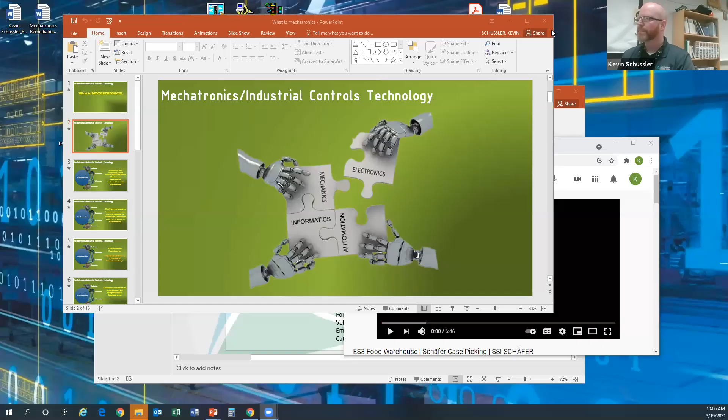Let me pull my screen up here. Share. It's taking a little bit, apparently Zoom is going a little bit slow today. There it goes, now it's sharing my screen. Or maybe not, it cut me off. I'm gonna have to share from this view because it went up. There it went, it finally just popped up. Give me two more seconds here, it's a little technical difficulty with the screen sharing. All right, we're going to share it this way. This PowerPoint has a lot of automation in it. Obviously we're talking about mechatronics and automation, and so this PowerPoint has a lot of automation in it, and I guess Zoom doesn't really like that too much. So we're going to talk about it slide by slide.

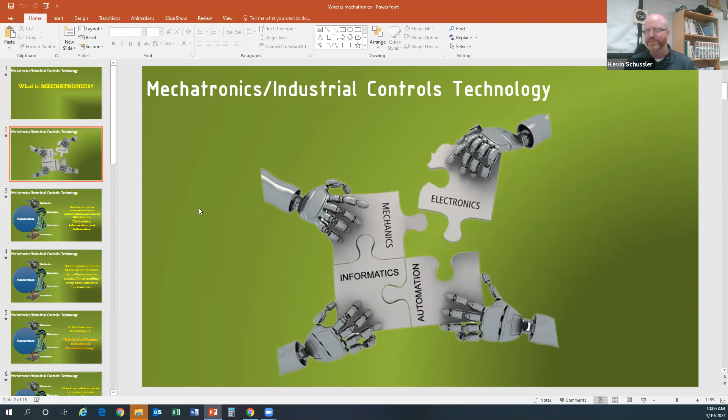I first just want to define what mechatronics is. Mechatronics is basically the convergence of all the major industry disciplines. So you see things like mechanics and electronics, informatics—that might be a new word for some of you, but basically that's like information technologies, computer programming, robotic programming, things along that nature—and automation. Mechanics and electricity and that information technology all come together to form automation for us.

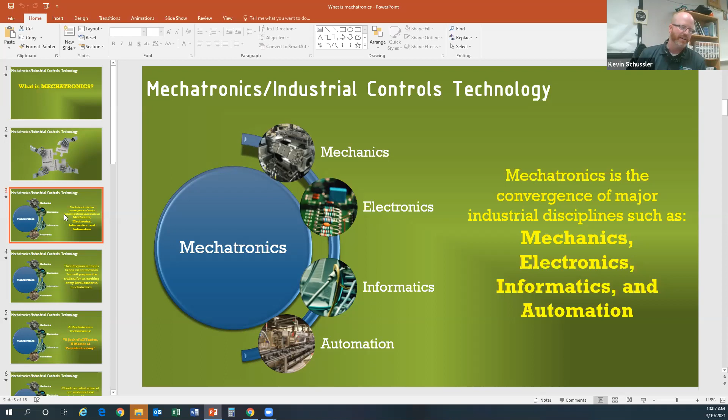Now that automation can be used in a whole bunch of different things. We can use it in a factory to make motorcycles, same kind of concept there, using it in a factory to make chocolate bars or bottles of water. We can take mechatronics and use it in a hospital to do what they call biomed, which is technology that helps people. And that actually goes into possible further careers in the power plant industry and things like that. So mechatronics is really wide, and it allows us to be able to kind of maneuver through the changing industry and technology as technology gets more and more in depth and more commingled with each other.

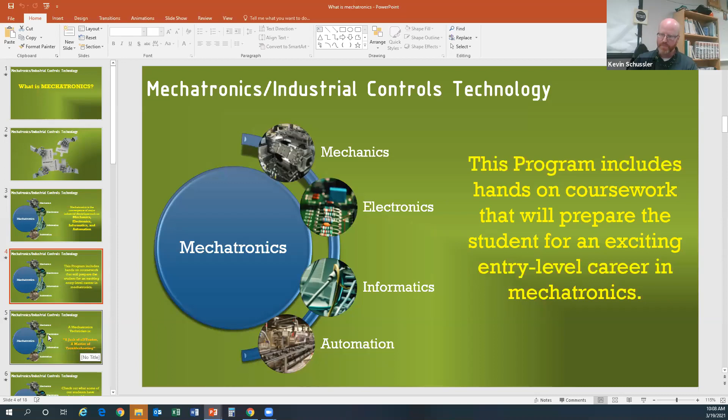One of the things that we do as a mechatronics technician, or just the way that I like to put it, is that we are jacks of all trades and masters of troubleshooting. A lot of people think that what I did in my professional career, I was like a magician. I would just show up and all of a sudden I'd be able to get whatever machine happened to be down at the time up and running, just by looking at it—oh, we need to look at this pneumatic valve over here, or we need to look at this fuse that needs to be replaced, or this wiring is not the right wiring, or the programming here is just not quite as efficient as it needs to be. And people would see that, my coworkers and other people would see that as kind of like magic. And it's not, it's truly not.

I like to demystify that as much as possible in teaching this class here at York Tech. I try to tell people all the time, I'm just an average guy. You just need to know the right things. And once you start getting that troubleshooting and knowledge and the base root of how things work, you start to fill that role as that industrial magician where you can kind of just get things to work. So that's really kind of what mechatronics is, it's a commingling of a lot of things.

We partner with a company called Siemens. Siemens likes to refer to it as the systems approach, which means that you're looking at individualized systems, but that are working together as a whole to make one complete process.

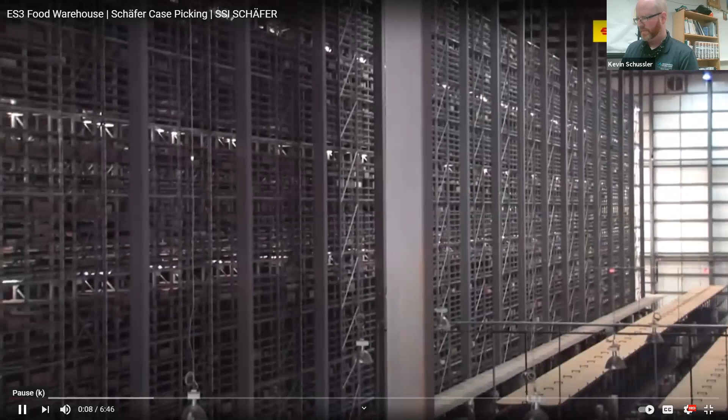Okay, let me switch devices here again. I'm going to try. All right, no more terrible sounds. Everybody can hear me again? Awesome. All right, so let me share my screen one more time here. Okay, got my screen shared. Get rid of that one. I'm going to pull this video up. And for some reason it's muted.

There we go. Okay, so the video I'm going to show you here is from ES3. ES3 is at Strinestown. It's that gigantic warehouse that everybody can see from 83 - as you're going north on 83, you can see that warehouse. I just wanted to show you what's inside that warehouse because it is pretty impressive.

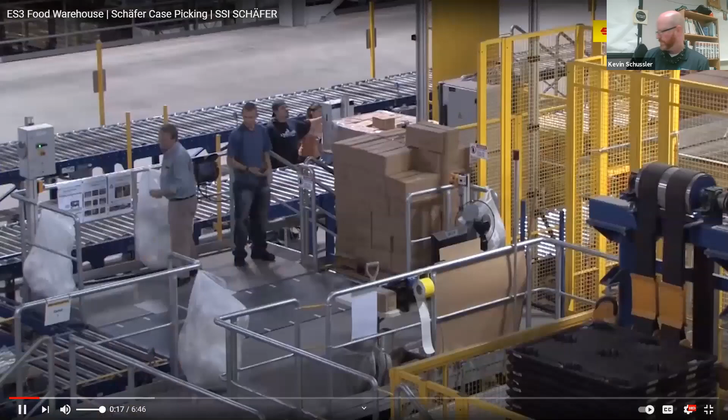Ideal logistics are imperative in the retail industry. SSI Schäfer demonstrates their award-winning Schäfer case picking system installed in the distribution center of ES3 in cooperation with C&S Wholesale Grocers, the US market leader in the wholesale grocery business. SSI Schäfer raised processes for ES3 to high-end technical standards.

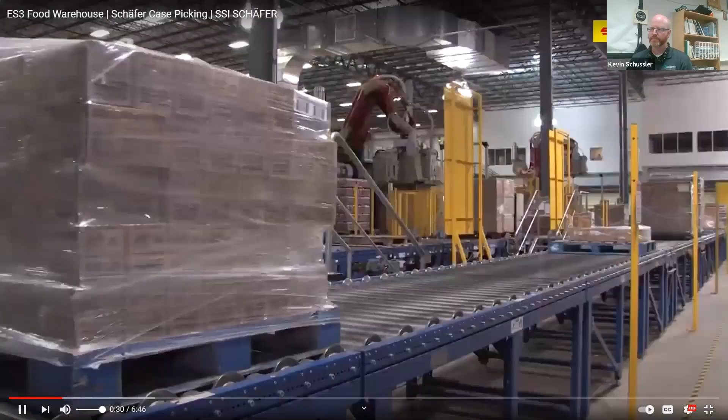15,000 different goods can now be picked and specifically sequenced for each store, fully automatic. Before the goods are stored in the warehouse, they have to go through a teach-in process where data is entered into specific software. A picture processing system collects all crucial information on the packages. The machine vision technology device allows more transparency of stock, expiration dates, range, and traceability of goods.

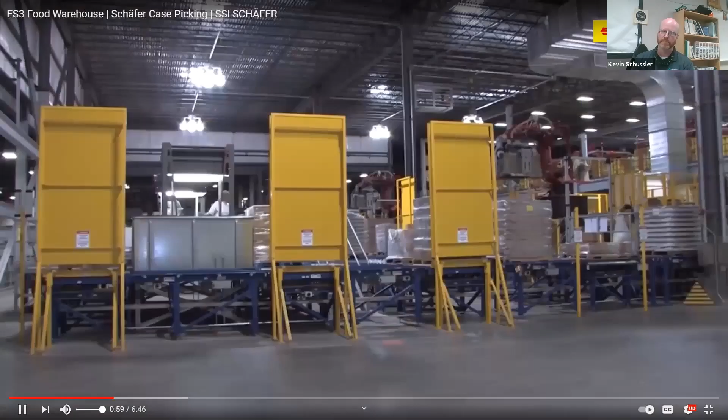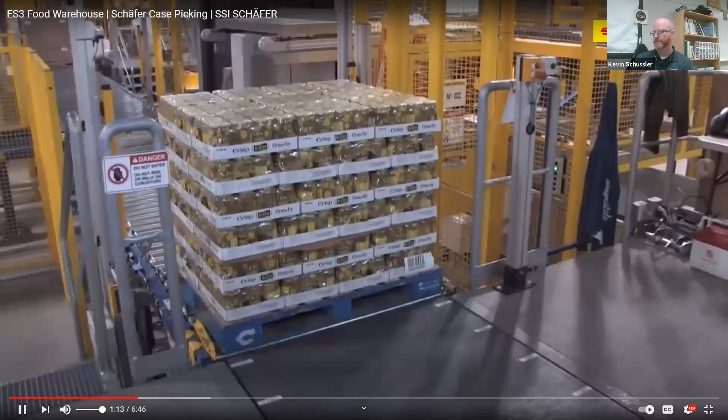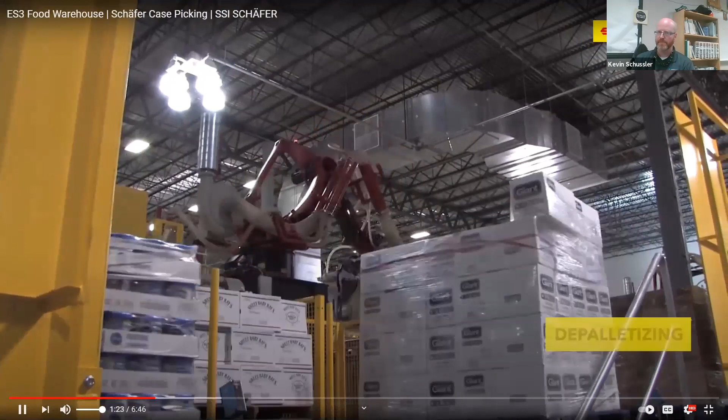Workers are now removing foil or other transportation safety measures from goods. Then they visually check the pallets and transfer them to a short conveying line. The pallet conveyors guide the goods to the depalletizing robots. The robots automatically depalletize the boxes layer by layer and put them on trays. This process is safe and gentle to the products. Even the slip sheets are automatically stripped and removed.

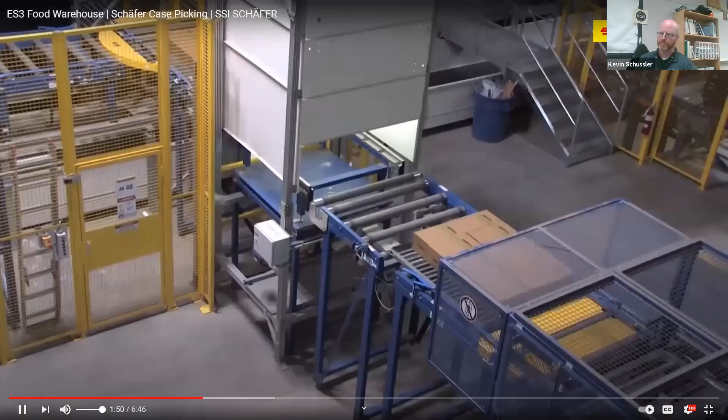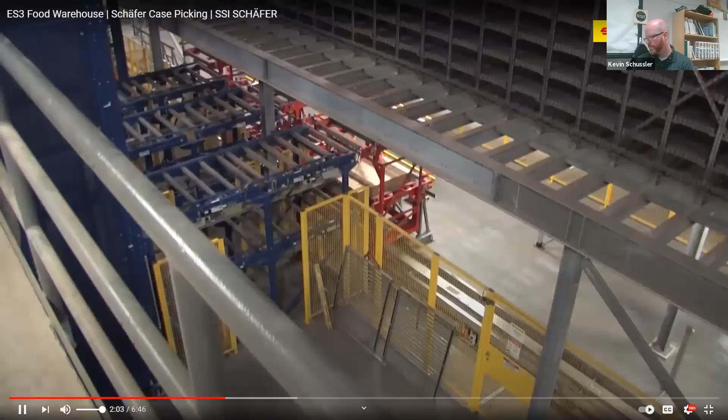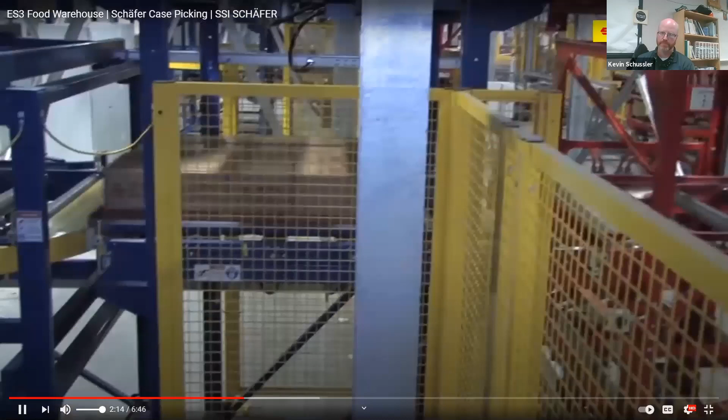Afterwards, the goods on the trays are transported across the conveying line to 6 transfer points. From here, they are moved to the Schäfer Tray System, also known as STS. In this process, the equipped trays are administered by the IT system. Stockpiling of the goods is not done with the usual SRMs, but with lifting devices and vehicles, which conserve space.

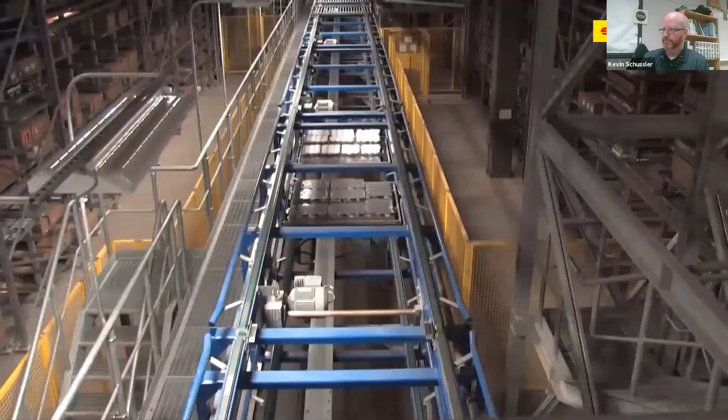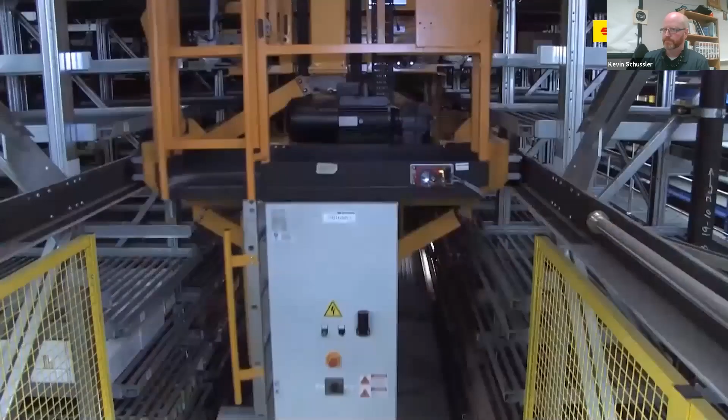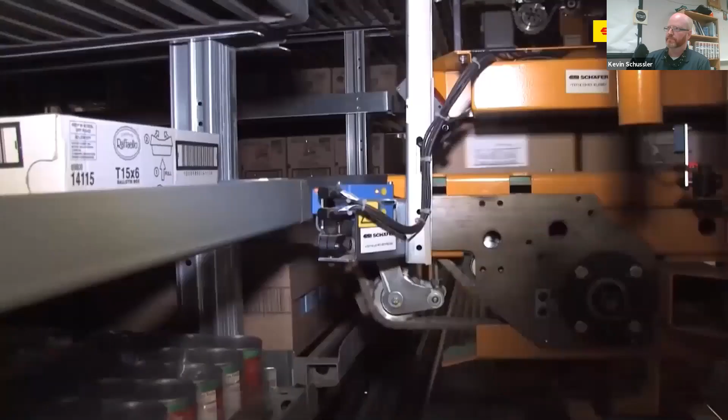STS racking system has a height of almost 80 feet and offers storage space for 90,000 trays. 36 vehicles are constantly in motion and safely deliver goods to their destinations. The horizontal warehouse movements of the storage and retrieval machines are detached from the vertically operating lifts. This makes stockpiling and stock removal very dynamic and efficient.

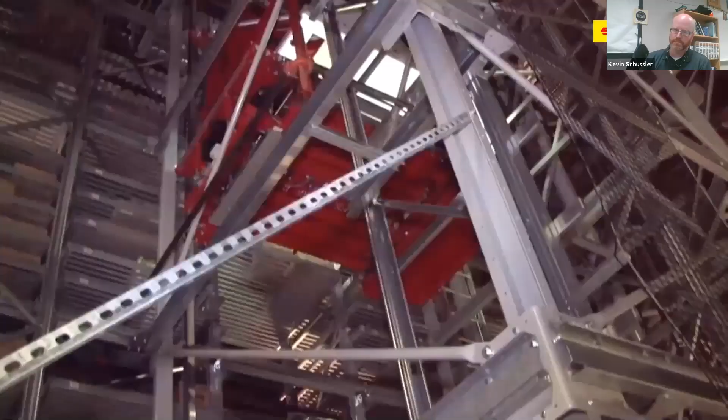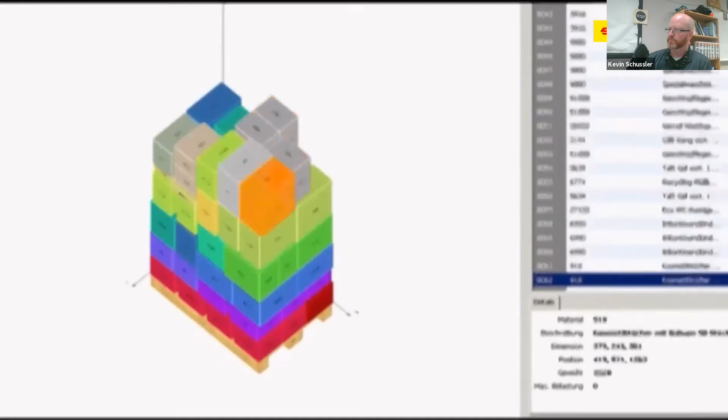Case wheeler lifts perform removal of the stock. They move the trays to a separate packing level, up to 4,500 trays per hour. A vision camera determines the number of goods. Rollers push only the required cases onto a conveying line. The system sequences the goods according to the Schaefer pack pattern generator within seconds. It calculates the optimum packing pattern, which determines the sequence of stock removal from the tray storage.

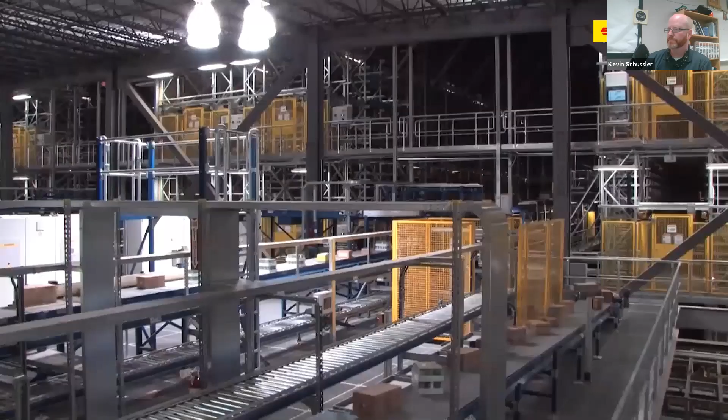Now window conveyors transport the cases to the palletizing robots. Safe and efficient. When the goods reach the robots, they're already perfectly sorted.

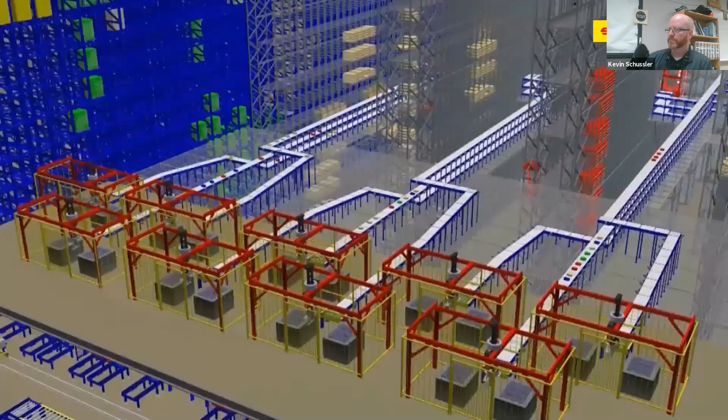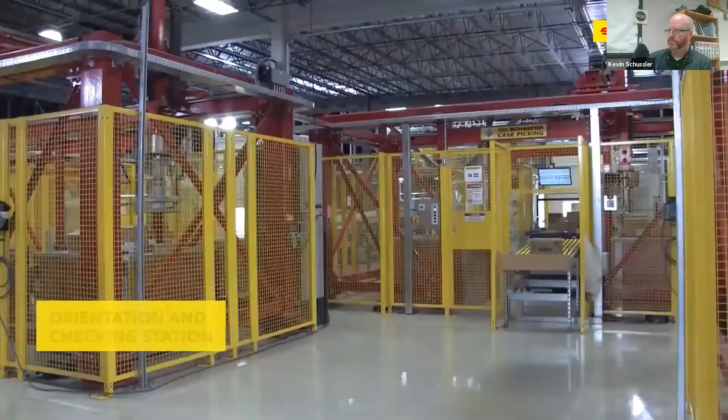Goods get checked again. A total of 9 robots compile the cases for orders perfectly, arranged by the ideal pattern, which has a calculated optimal volume and has been compiled according to product groups. This reduces the sorting effort in stores to a minimum. The system is designed for a throughput of up to 74 pallets per hour.

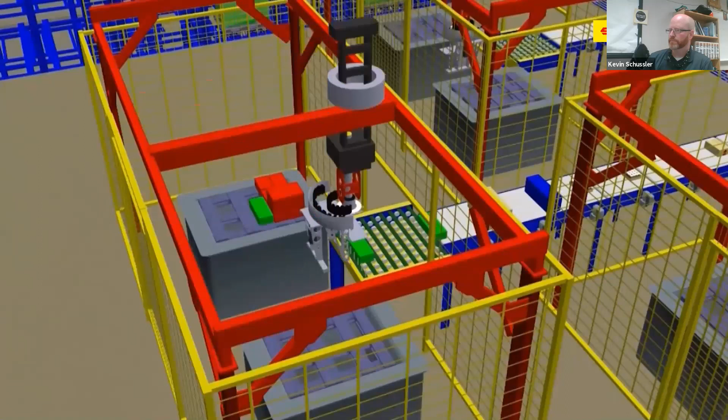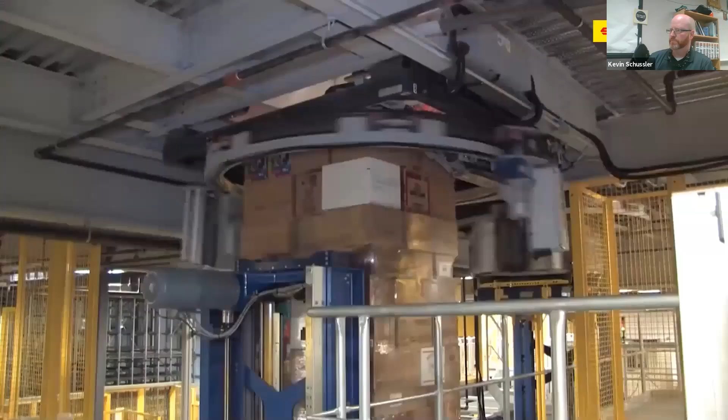The pallets rest on spindle lifts, which are slightly lowered after each packing level until the predetermined packing pattern is complete. Then the spindle lifts lower the packed pallets onto the goods out level. At the same time, they are automatically wrapped in foil by a stretcher. This increases stability.

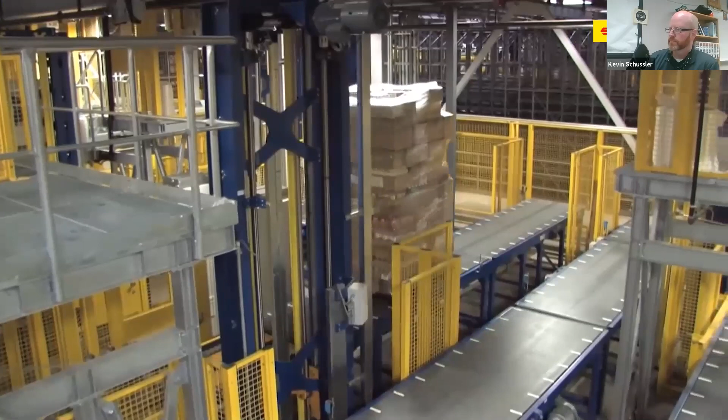Finally, the goods are allocated via a conveying line into buffer areas in the goods out section. From here, the perfectly packed pallets go on their way to the stores.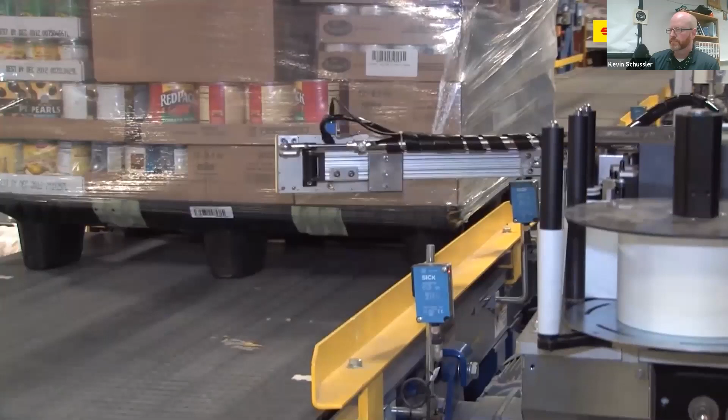There could not be a more efficient process. With this solution, SSI Schaefer has drastically increased the storage, picking, and supply quality for ES3. Even the Council of Supply Chain Management Professionals in the USA agrees. This solution at ES3 has been awarded the Supply Chain Innovation Award 2011. Thus, SSI Schaefer sets new standards for intelligent intralogistics, even on the American continent.

Alrighty, so after seeing that video, I don't know Kevin, if you had any questions pop up along the way, because I'd like to take a little break there and answer any questions from everything I've talked about so far before I go on to our next segment. I didn't see any questions coming in at this point.

One of the things I love that you just touched on is I've gotten to tour that facility. I know this isn't necessarily mechatronics, but it's like if you've ever been in New York and seen the taxis, wondering how they're not constantly hitting each other - watching the pallets being driven around by humans and how quickly and efficiently and close they get. At least at the time I visited, they'd gone such a long stretch of time without any accidents. It's impressive how much is going through that facility. I always love when programs like this expose students to what's going on in this area. So that is an amazing facility. So many people drive by and wonder what this huge building is and what's happening there - glad you got to highlight that a little.

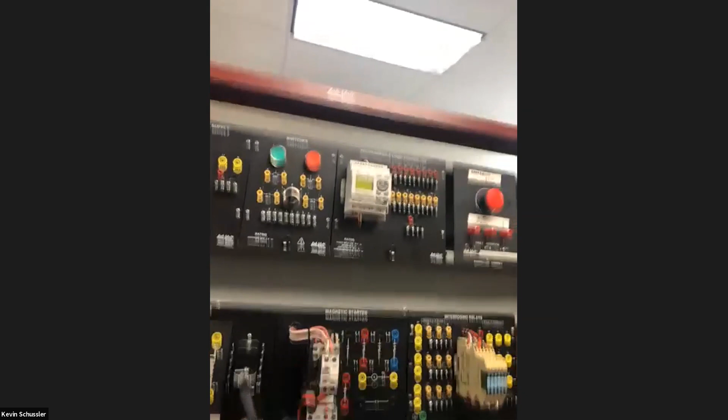And then that all transfers into being able to work on motor control systems. Motor control systems are these where you see, I've got a magnetic starter here and some switches, and we will actually control the movement of an electrical motor. What I'm teaching here when it comes to voltage, I only teach what is used in industry, so we're looking at three-phase power in here.

I start my students low, we learn Ohm's law and things like that, and we start with 24 volts, but we quickly move up through the voltage range. This set sitting here in front of us works at 208 volts, and then we'll come to stuff like this machine here, which works at 480 volts. Now, 208 and 480, they both are industrial standards - this is what factories use.

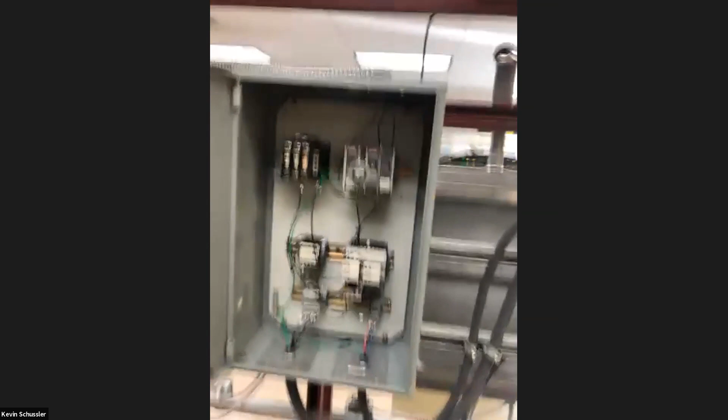So we will work through exercises to learn electrical systems, such as this, where this is just a simple motor control. My students this year built this. At the end of the year, I'm going to tear all this stuff apart, and my class next year is going to have to build it all over again. So I give them real hands-on experience from the ground up as to how to build these systems.

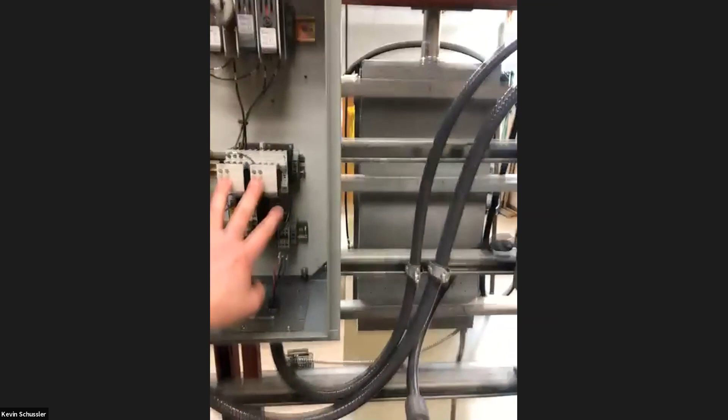One of the things that I pride myself on is using things that we would use in industry. So this contactor in here, it's not a simulation - this is an honest, real contactor that would be used for motor control. This is a disconnect, which would be used again in a motor control scenario, much like this one.

I've got a transformer in here, and again that's a control transformer - same thing that you would see in any industrial cabinet. And again, that video that I showed you from ES3, all of that equipment in there that is running around, inside there's an electrical cabinet somewhere that has this type of equipment inside of it.

And then again, we do get into some of the minutia of electrical as well. So like bending conduit, you can see plenty of stores of conduit and things of that nature, running wire, and all of those things. So we cover electrical pretty well and pretty thorough.

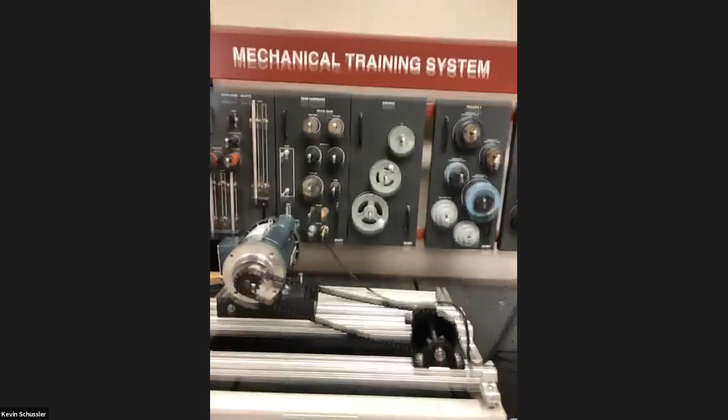And when we get to motors, I have to cover some mechanics. This is where we go through, and we're looking at things like chain drives and gear drives. You can see right here on this workbench, different types of sheaves and pulleys that we're going to use, and kind of work through and get to put together and see.

Again, my students work with their hands all the time. So I might spend maybe an hour on theory in a class time, and then we're going to spend the next 4 hours actually working that theory out physically, so that way they're not just learning the theory of how things work, but they're actually getting to see it hands-on for themselves.

Now, on the mechanical side, we also teach our students how to weld. You can see I'm showing you the one welder I have just in here right now, but we actually have a welding lab here at the school where my students will go, and they have an expert welder come in and teach them the basics of maintenance welding, which is very important.

As well as on the mechanics side, we also teach machining, which, in the school itself, we have mills and lathes that our students will learn how to use. In every maintenance shop that I've ever gone into, they typically have a mill in the corner, and it's just expected that the maintenance technicians know how to use that mill. Now, unfortunately, I don't have one here in my classroom - I just don't have the space in here, but that is part of the mechanics then that we teach in here as well.

So all of this is pretty much industrial electricity that I've talked about so far. Then one of the areas, and again, I like walking around - I hope I'm not making you seasick on the camera, but yeah, I just like walking around, it makes it easier to talk.

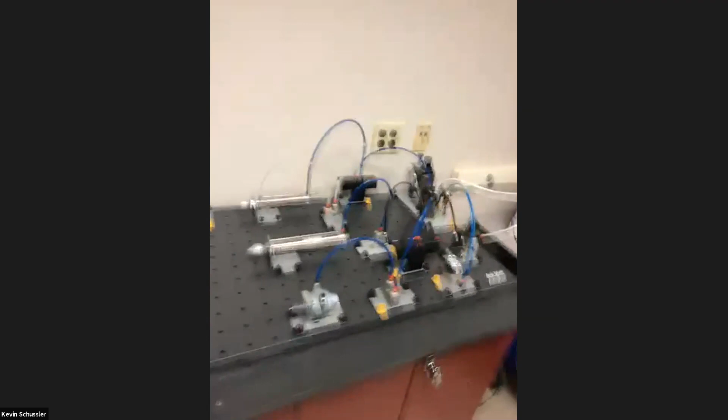So one of the other areas that I teach here as well is fluid power. Fluid power is both pneumatics, which is air, and hydraulics, which is oil. We talked about PLCs being kind of like the brains of any operation; fluid power is the muscle. We're going to use fluid power to help move products, and to muscle machines and move things around.

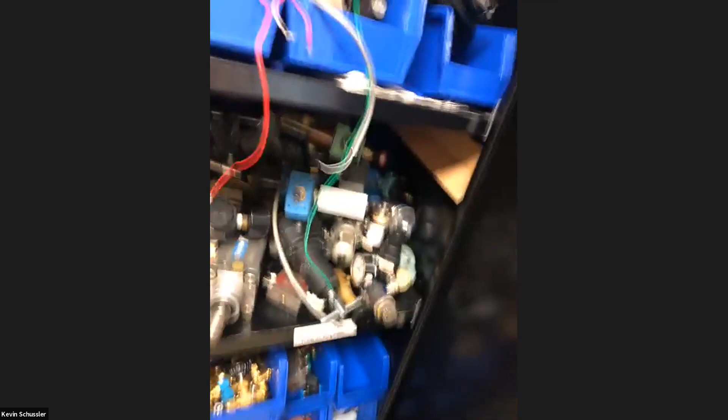Again, I pride myself in getting all the things that industry actually uses and putting these into your hands as an instructor. So it kind of looks like a mess, but there's all kinds of actuators, regulators, and valves in there that are real. This is what you would actually see on an industrial machine, and I expose you to the real industrial components.

So we do fluid power, and we get all the way through fluid power, and then probably the hardest class that I teach is one called circuit design. Now, if the other classes I taught were all about how and what things are, circuit design is why. I do spend a good bit of time on why things are put together the way they are, because there is logical reason behind why we put, whether it's an electrical circuit and the types of fuses we use, or a fluid power circuit and the types of hoses and things like that. There are real reasons why.

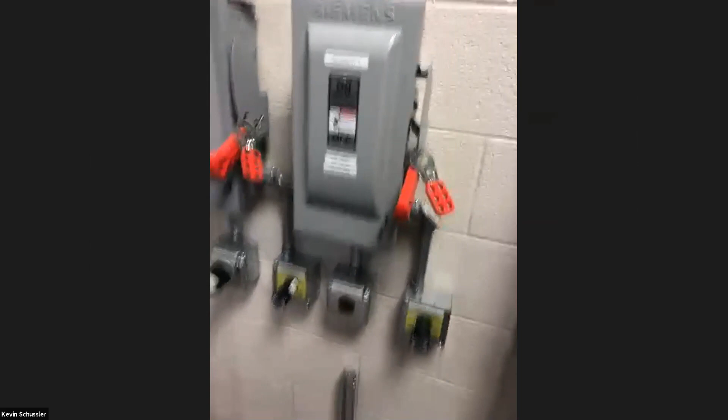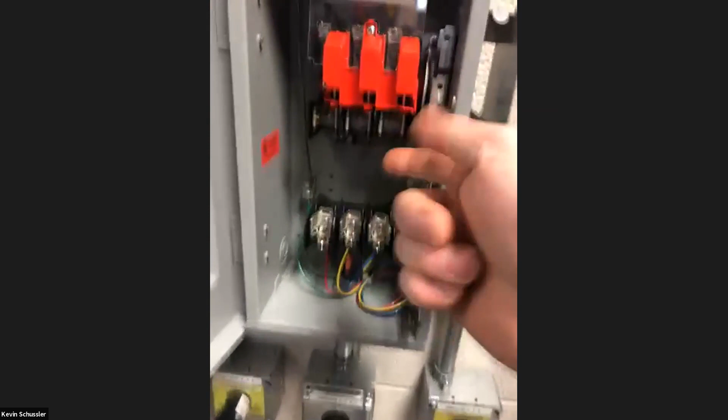If I was to look into this disconnect right here, let me turn this around so you can see it. I wanted to know what was downstream of this disconnect so that I could put fuses in, because you'll notice there are no fuses here. I need to know what machine is downstream of this. Is it this taper right here? So this taper is what I'm going to plug into this disconnect. What kind of fuses do I need to use to fuse it correctly? That's the kind of thing we work on with circuit design.

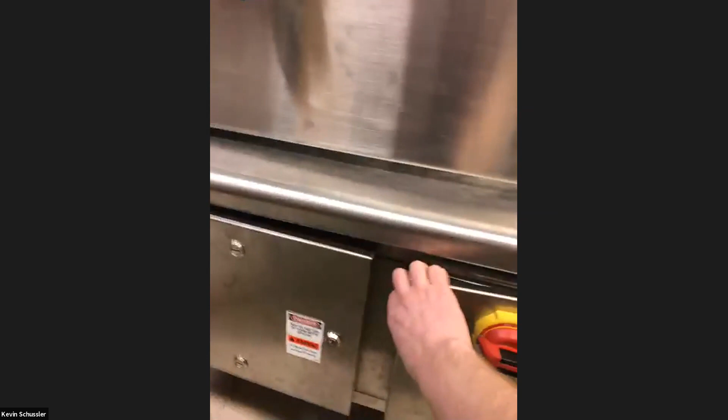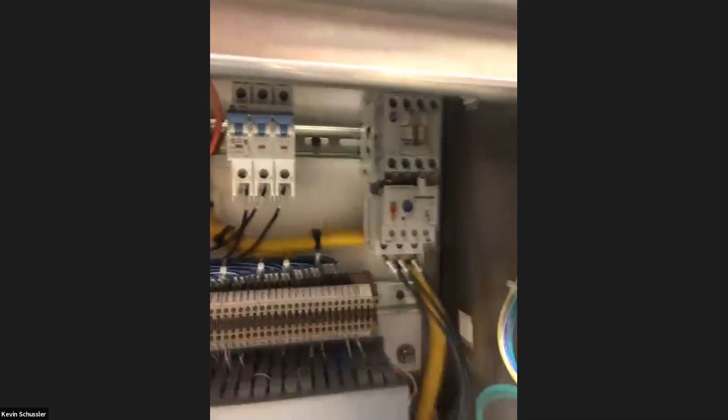By the way, this machine is one of my pride and joys. It was donated to us by a company called JLS. If you look inside, you can see it actually has a PLC, but it's built as an industrial machine, so it has all the parts and components - fluid power, motor control, everything required for it to be an industrial machine. My students get to work with this machine and get real life experience working on automated systems, because it is an automated box taper. That's what it does, and they get to see it.

One of the classes I ended up teaching, and the one we just finished, is troubleshooting. They would come to this machine, it would have a problem, and they'd need to go in and use all the knowledge they learned - mechanical knowledge, electrical knowledge, what they knew about circuits, fluid power - and bring all of that together to troubleshoot and fix the machine.

One of the other parts of the program we talk about for a good bit is robotics. This is my in-class robot, actually from Rethink Robotics. It is a collaborative robot, and it's one my students can play with and use as part of their capstone project, or just to learn from.

We also have access to industrial robots, which are just so big I don't keep them in my room - the ABB 6. They have 6 axes on them, and they're real industrial robots.

So what is the difference between an industrial robot and a collaborative robot? Well, collaborative robots are meant to work around people. This particular robot was designed to be sat in front of a machine in place of an operator.

If you think about that, they would put a different end effector on here and have this robot press the start button on the machine. The machine would manufacture the part. When it was done, the robot would open the door, take the part out, put a blank in, close the door, and press start on the machine again, and it would run. That's the whole point of a collaborative robot.

So it doesn't have to have any guards or anything around it. Industrial robots are typically programmed for a specific task and are not meant to have people around, so they always put fences around them. That video I showed you of ES3 had those really large depalletizing robots in it, and they use those completely fenced off as well.

There was really no human interaction with those robots, other than someone standing on the side that every once in a while might have to press start, or the mechatronics technician who has to go in and repair the bot. So we do spend a little bit of time there with robotics.

The last thing I want to show you is basically how our program ends out, because you can learn a lot of things, but if you can't apply them, it just makes it that you have a lot of knowledge and don't know how to use it. So at the end of my program, we do something called a capstone project, where my students conceptualize, design, and build their own industrial machines. These machines are prototypes, and what I'm looking for when we're building these machines is the systems that they put in place.

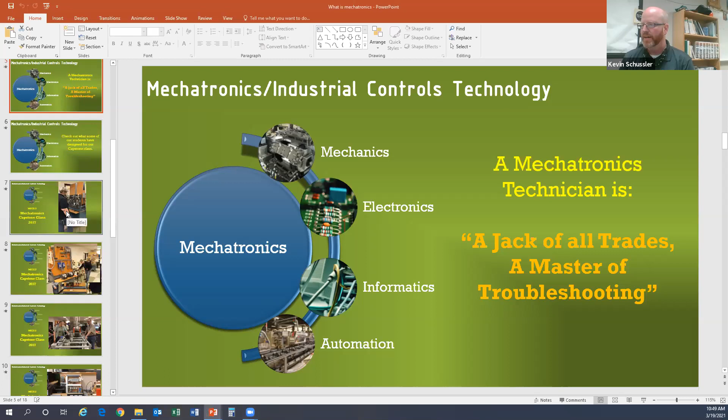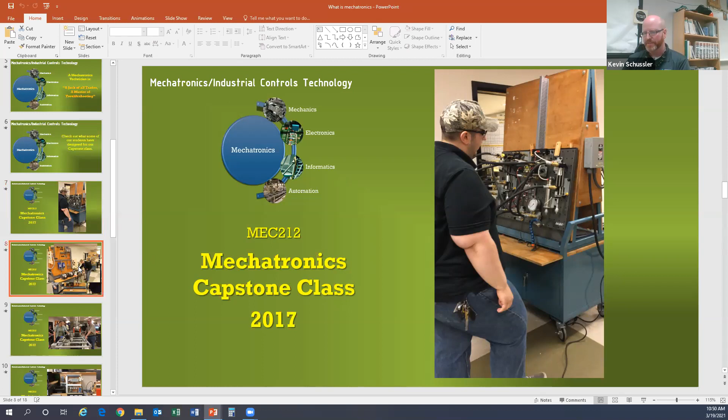Some of my students are pretty inventive. This particular student built what was to be an automated log splitter. He just had this crazy idea of, you know, my family splits wood all season long, and it would be great if it was automated. So he put into practice a completely automated log splitter, and it worked. Again, I was one of those, like, you can see the log splitter down here on the bottom, just barely. I didn't let him bring in real logs and start splitting stuff in my classroom. I probably could have, but I was like, no, we're gonna hold off on that. But we saw all the systems, and you can see on the board here everything is open, you can see all the systems he put into place to do that. He obviously had to use hydraulics to split a log, so it's a combination of hydraulics and electrical, and PLC is in there too.

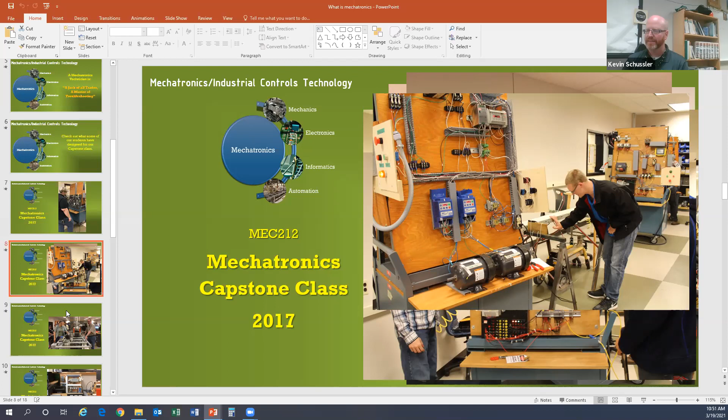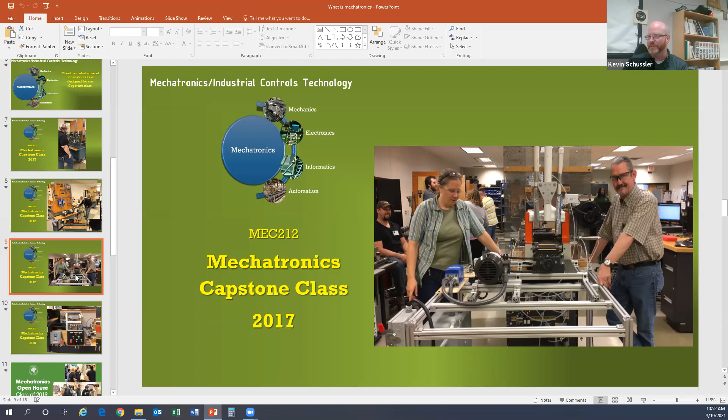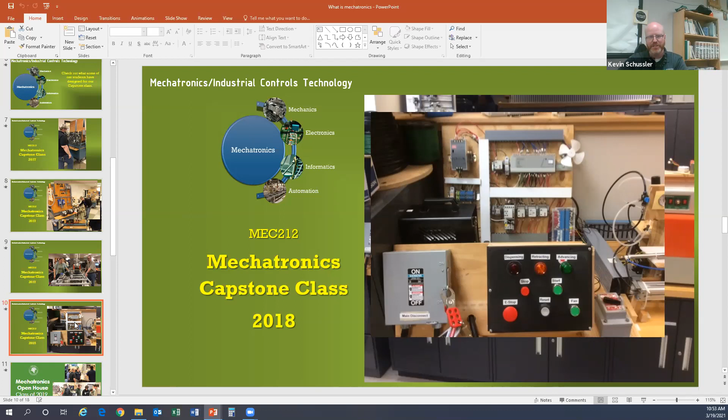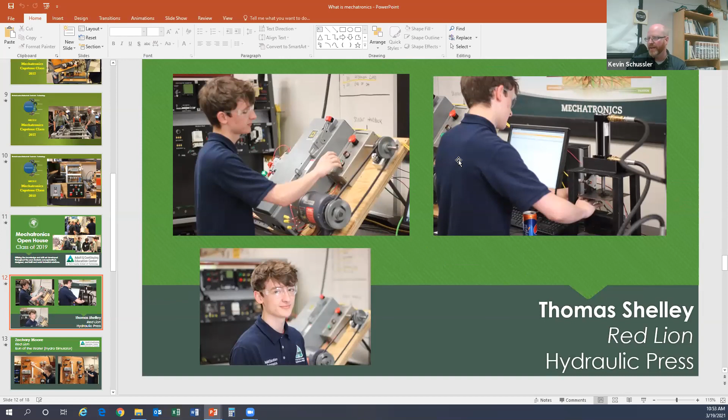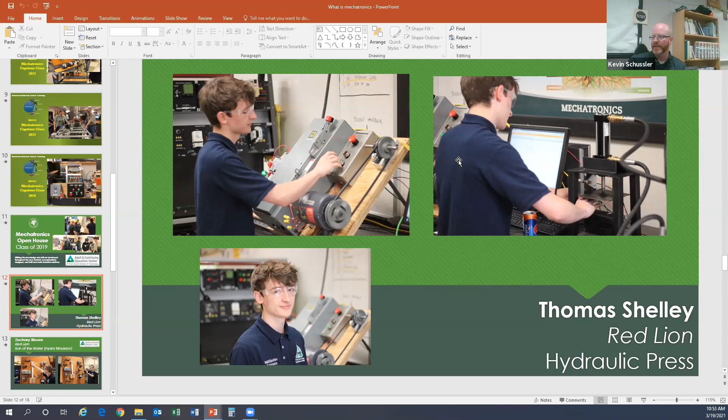So this is my open house from 2019. This is another hydraulic press, another student who made a hydraulic press. This, by the way, is the student I mentioned earlier. He is now working on aircraft, he works on helicopters, and he's absolutely loving his career. He emails me from time to time telling me about his successes, but he got his start here in mechatronics in this class.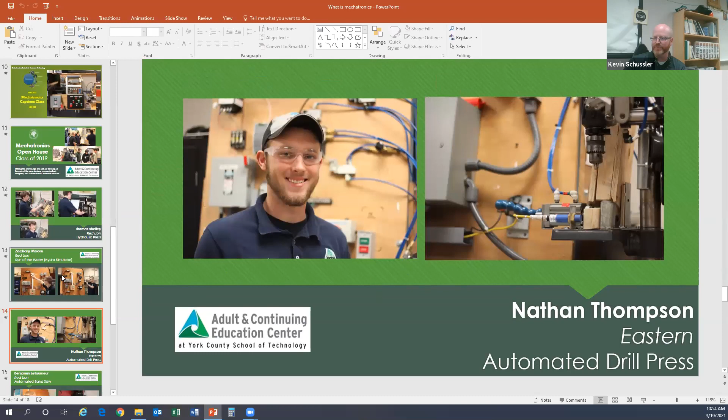This particular guy just had an idea about something. He decided he wanted to try, and he built his machine. He made an automatic drill press, so this would feed parts in and then drill them, feed and drill. He made all the pneumatics work and got the drill press to work automatically. He actually brought in one of those old desktop Craftsman drills that a lot of people seem to have, and he completely automated the thing, which was phenomenal to watch him use the knowledge he gained from our course here to do that.

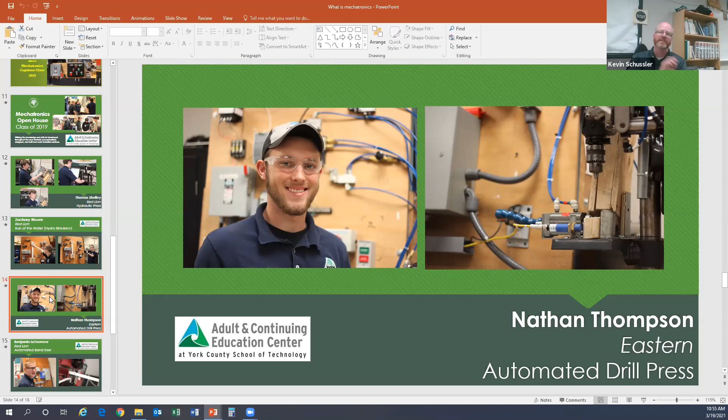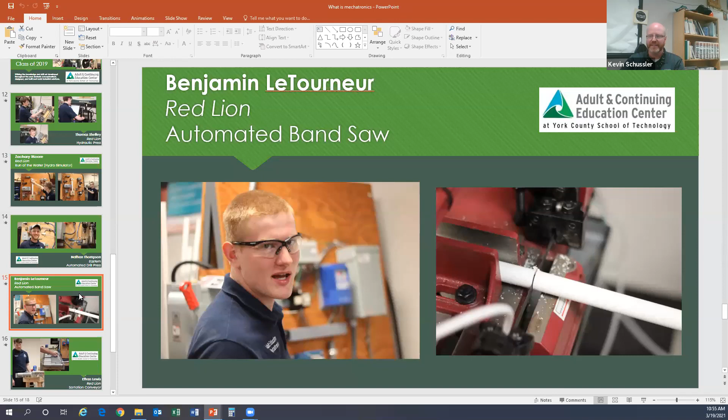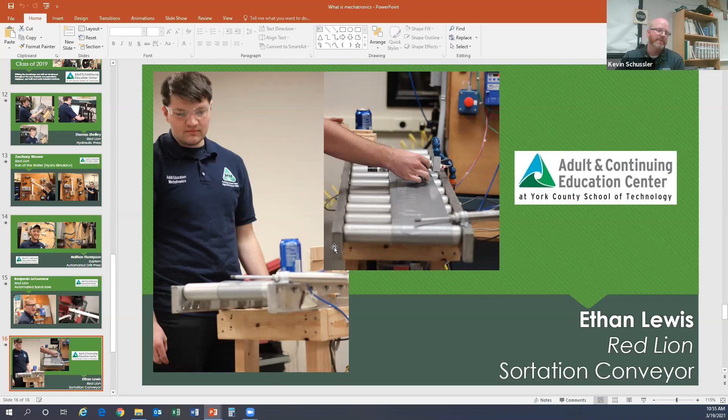So I keep name dropping all these companies, and this is only a small number of companies that I work with, but I work with and talk with a lot of companies.

I think it's super important for us as a school, for myself as a professional, to be well networked with a lot of companies. So I network myself with all our local companies here in the area that are using mechatronics every day.